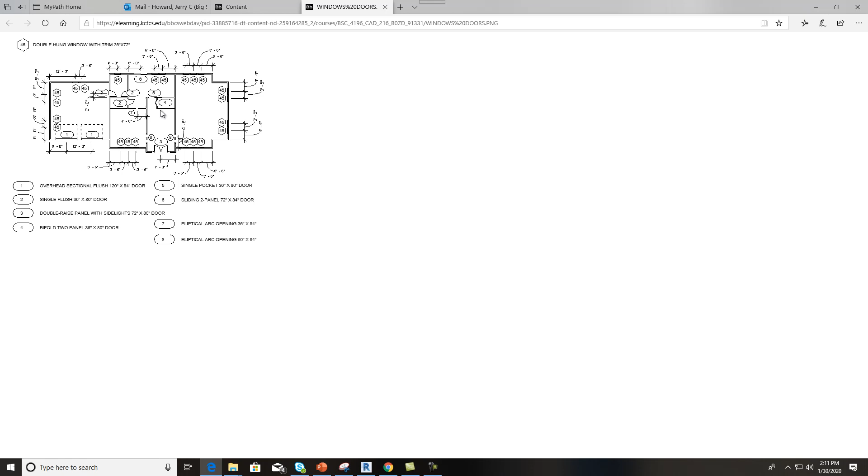I'll click on windows and doors, and let's blow that up a little bit, hitting Control plus. If you'll notice, there's windows. These are our windows and these are our measurements. Windows are always measured to the center, and the exteriors to the outside exterior edge. The interior walls are to the center. We see here these windows say 45 on those.

If you look up here, here's the symbol 45. These are double hung windows with trim of 36 by 72. We can look, and it looks like that's about all the windows in here. So it's quite a bit of windows, big windows.

The next one to look at is some of our doors. Here's our garage doors, number 1, overhead sectional flush, 120-inch by 84 door. Single flush, 36 by 80, is these number 2s here. Y'all see that? Double raised with side lights.

That'll be a big porch, so it's a double door with side lights, meaning it's got glass on the sides of it. Here's a slide door, and we got a bifold door right here.

We also got 7 and 8. Right here is 7, and you can't really see it, it's way up there, you can't really tell much about it. And right here, those are openings or elliptical arches, and this is the measurement to the center of those. This one isn't showing that well here, but it's coming 4'6" to the center of it.

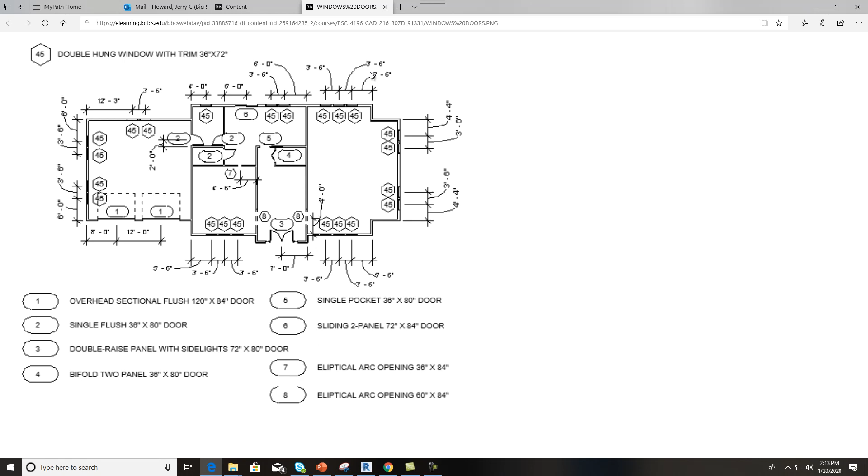So I've printed a copy of this out, but I'll still take and throw this to the side just like I have before. I'll go in there and grab my Revit again and sling it to the side. So when you start putting these things in...

There's a few things we got to understand. We go back here and look, remember I had all these loaded up. Now, Revit has a library built into it that has these things as well, but it's pretty simple to put this stuff in, like on your little cabin you did. It's the same process.

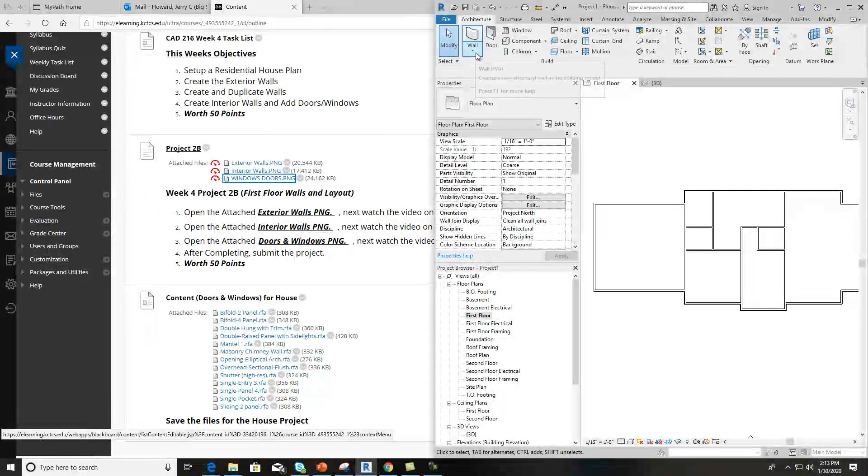What I want to do here is go into Window, and you see how there's some already put in here - there's a double hung window. We're going to put in number 45, the 36 by 72. We do have a 36 by 72, but it's fixed with trim, and I'm not seeing what I want, so I've got to load it up.

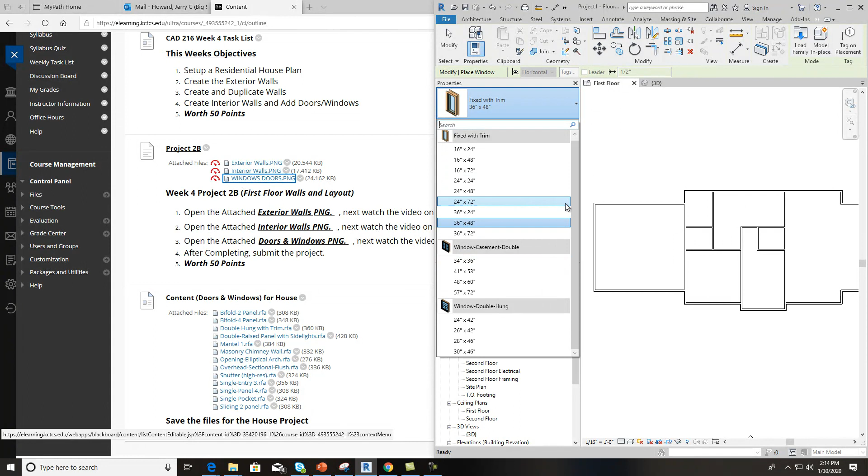Now, in this software, you can come over here and hit Load Family, and you can go in here and look for windows, and they will be there. There's all kinds of windows built into this, and you can probably find what you're looking for in there.

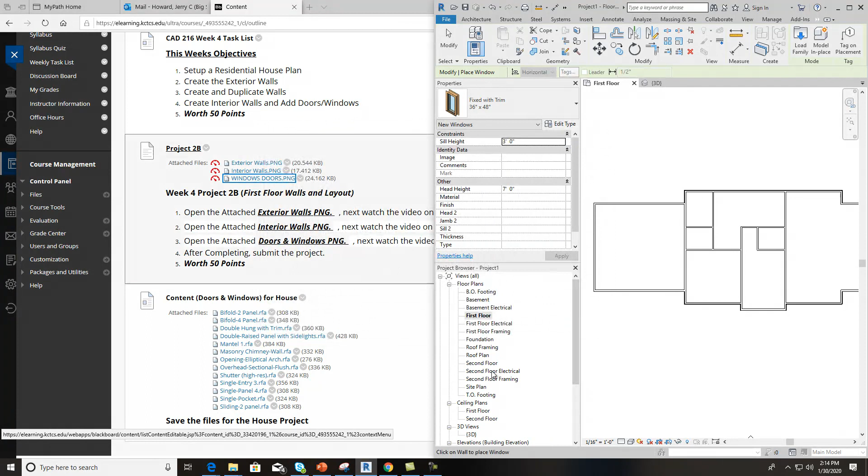But what I want to do is use what we have in here, what I've sent to you. Now, you can do this - we can come in here and find that window, which is the double hung window with trim. So I just right click on this and select Save Target As, and I want to put it... I'll put it on my desktop and save.

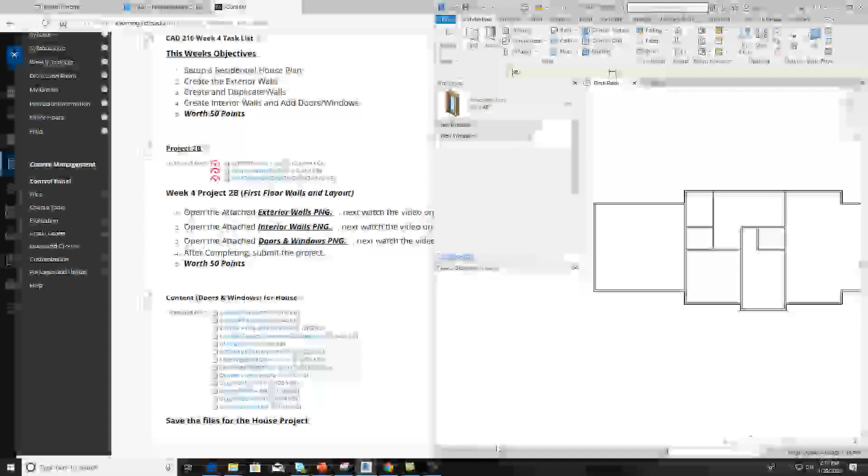Now I can open this up, and there's a couple ways to bring this stuff in. You can actually open it up just like I just did, and check out this - if you've got your software open with a project, you can hit Load into Project and close.

And now that window, you see how it's loaded in now? Let's see where it's at. Double hung window with trim. That's one way of doing it. Or you could have hit load family here.

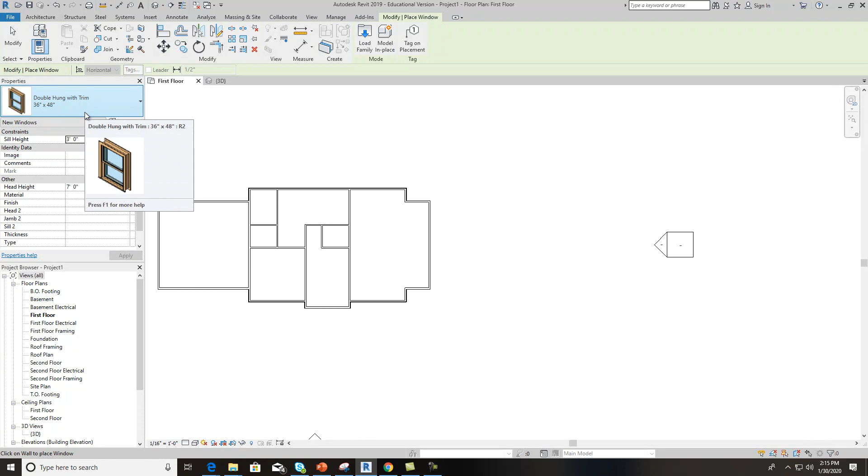You have to be in the windows or doors. You can hit load family, and then go through and find it here. Go to your desktop, so on and so forth, and load it in. Either way, but this one takes 36 by 72. So just write down 36 by 72, and go in here and zoom in.

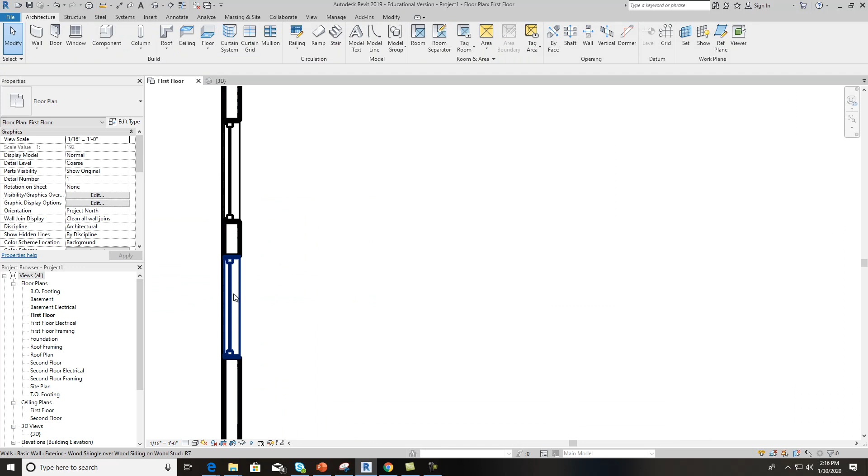I've got this sheet in front of me right now, and you just go in and start plopping them in. There's a couple on this side, and again you want this section here to be wider than this, because here's the actual window. So just start putting those windows in, and I always put them in before I try to do the measurements or anything on it.

There's one right here. There's two right over in here somewhere. There's three over here. And if I do put them in the wrong way like that, just click on it and you can flip it like that. And then window over here, and so on and so forth.

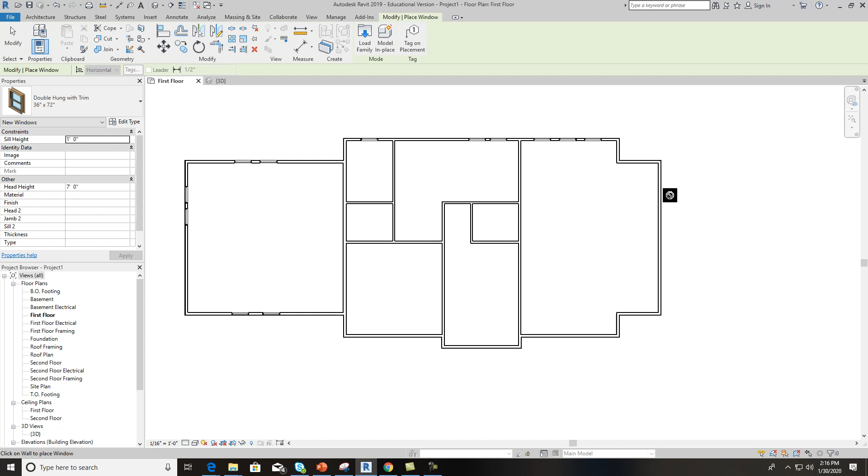I'm not going to put all this stuff in, I just want to show you how to do it. But like up here, we start dimensioning these things.

Again, click on it. This would go all the way to the exterior, and it should be 12,3. The next one, if you click on it, from the center of it to the center over here is going to be 3 foot 6. So 3,6, just like that. And that's how you get those measurements in.

So hit annotate, align, and I want to put face of core. I hit that, and see, it's not hitting exactly where I want it to. Wall faces, there we go. Wall faces hits right where it needs to.

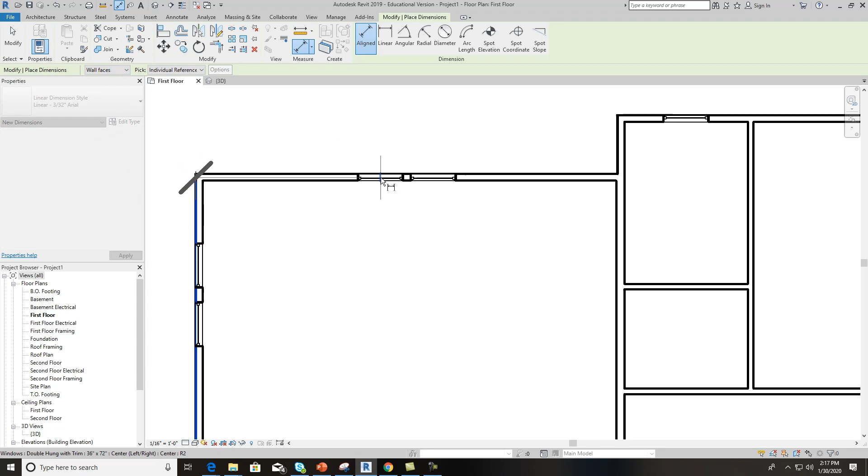And then I'll hit my center of my window to center this window, and it's dead on if you want to check. So make sure you zoom in there and look. I should be right on the end of this instead of inside of it. And you just go around and you can do that.

And like this, again, I click on that, and I click on that. And again you have to click on the window to get there. And you see I'm all the way to the edge, to the center, and this one should be 6 foot. Click on this one, and this one, between this and this one, centers of them, it should be 3,6.

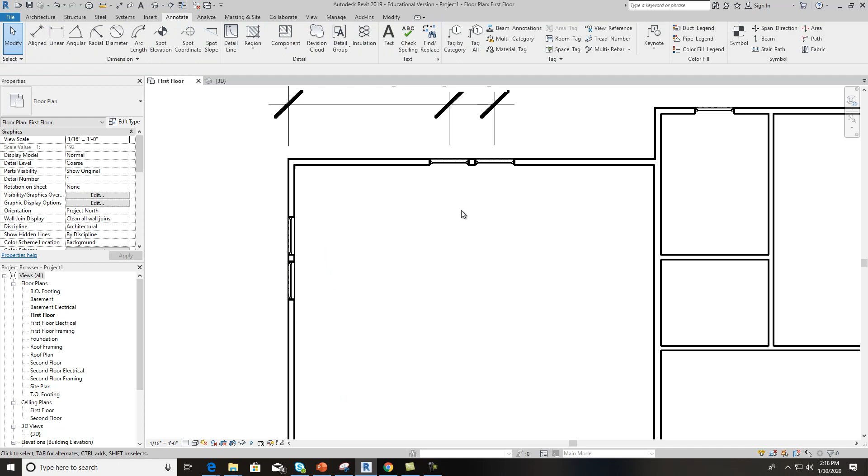So just go around after you get all the windows put in, and then get them all laid out. And I put windows down here, but that's not windows, that's garage doors, so I'll delete those out. But you can see how I was coming up with those, and there should have been some windows over here too. So make sure that you get all of the windows in and get them all measured according to this print that we have in front of us, this right here.

Okay, so now I can put my garage doors in next if I want to. And again, I'll go in here and check out and see what I got. Garage doors, double raised with side lights, overhead sectional flush. So click on that, and I want to save as.

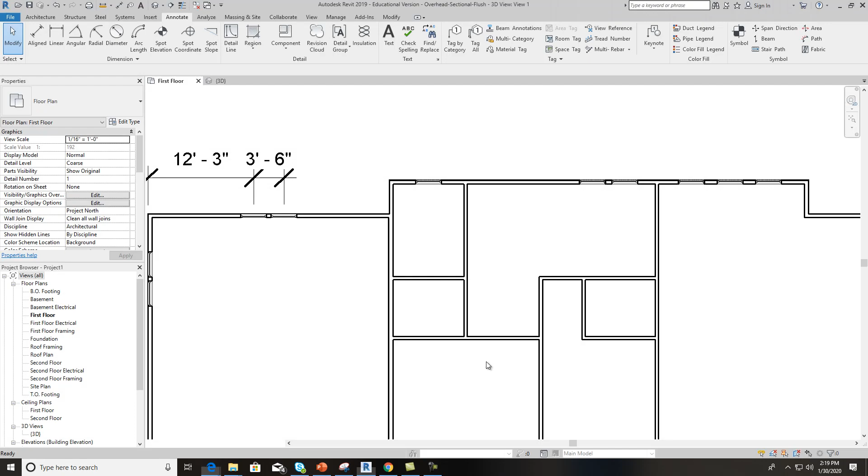I'll put it in my desktop and hit save. And now open it up, and it'll open up in here. Just load into project and close. It's a good way to do it.

I can come down here and just plop it in, just like that. Align, catch there, catch that, catch that. Come out here.

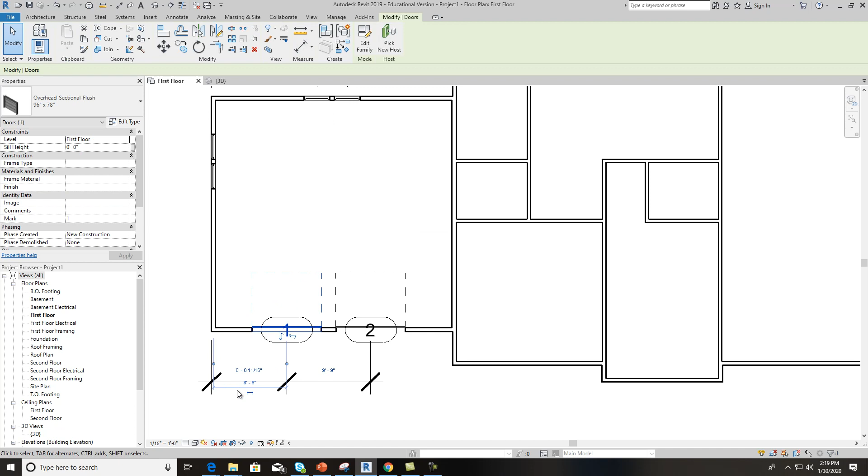I can actually click on the door itself. Click on this, 8. And I can click on this one, and here's between those, that's 12. Boom, they're in there, no problems.

And the same thing goes with over here putting in your doors. We take a peek at, like this, number 2, these single flush doors, 36 by 80.

Just go back in here. 30, and these are single flush doors. You can come in here, single entry, single panel. I'm assuming that's what that is.

We'll save as, put on desktop, single panel 4, and open it. And when it pops open, it'll show you what the door is.

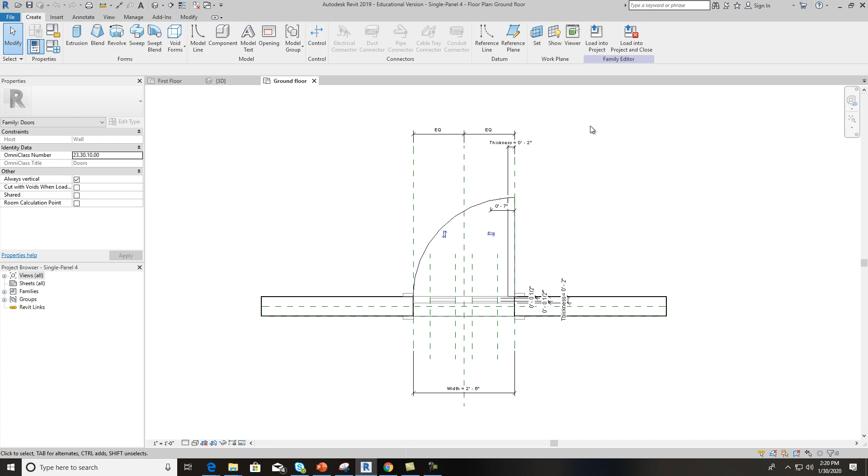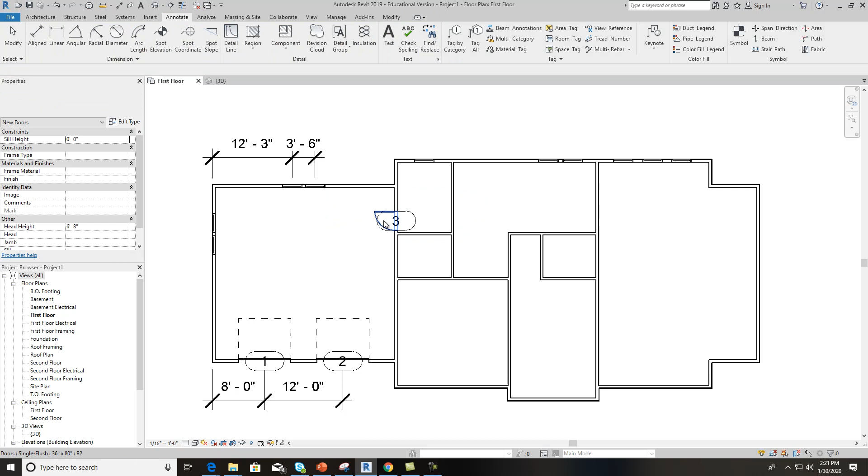So I hit load into project, and I need to go over here and see, there's a single flush, 36 by 80. I can go in here, and when I put the door in, it's just like what we did on that other one. Just click, and once you get in, you can actually tell it which way you want it to do, and flip it around like that.

It's got that big tag on it. You can actually grab those tags and move it. I got my scale blowed up so I can see this. Typically, we probably do this in 1/4 inch equals 1 foot. You see how much smaller they are? I was just doing that so you could see those.

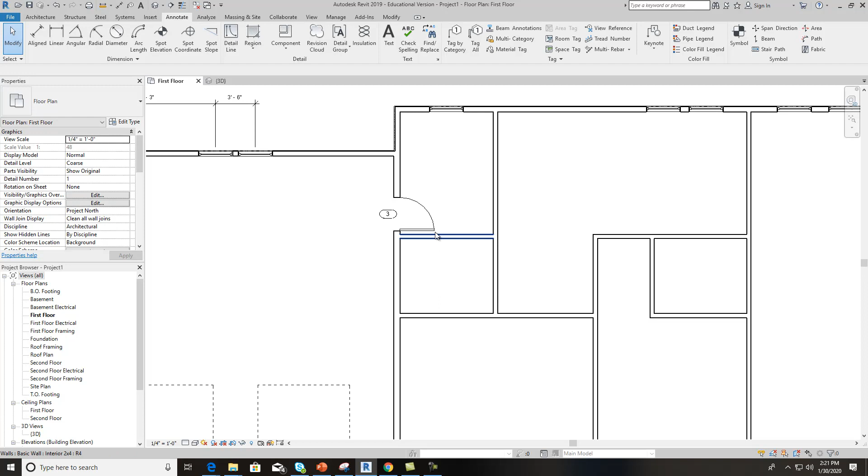And this would be right up against it like that. So again, measurement on that one, you click that, and basically that's right on the money. And you want to put one on the other side as well, so you just go back into door, and you guys know the song and dance here. Put that in, escape a few times, click on your door, turn it around, and put all of those in there, okay?

And I'll show you a couple more things here. I want to put an elliptical arch in this thing, because it does have one here, and it's got 2 down here. Instead of doors and windows, you have to hit component, place a component, and we do have those already in here. Now we can use the ones in that we have loaded up if you want to.

Let me go back out of here. Let's see here. Opening elliptical arch, click on that. We do have it. I want to save it. I want to show you all a trick here.

I can actually go into Revit now and go to component, architecture component, load family, and you can do it this way instead of doing it the way we've been doing it. We've been opening it up and sending it to the project. If you've got a couple projects open, it might not send it to the right one.

So what I do in here is just go, again, architecture component, and I come over into the modify place components, load family up, and instead of looking in here in this, I can go to my desktop where I have it saved, and I should have it in here somewhere, and here it is, opening elliptical arch, and OK.

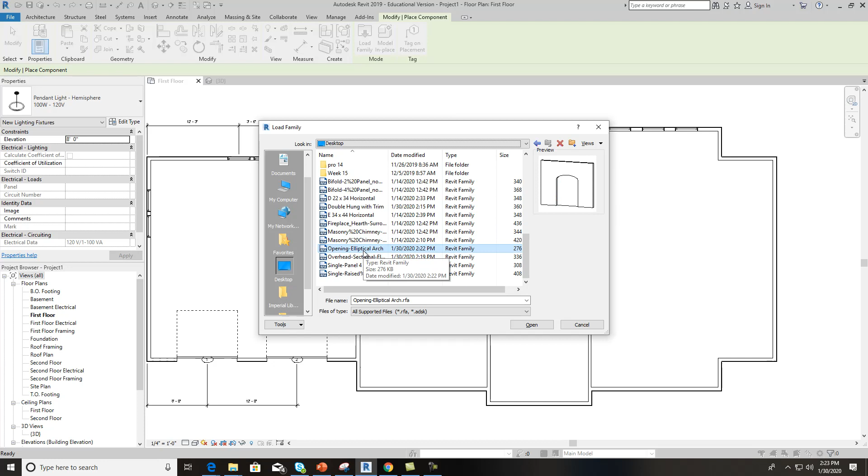And when I do that, now I can put my arches in, and the one up here is 36 by 84. So I click, it's in. Down here, I got to change those because they are a little bigger, 60 by 84. It's pretty good size arches.

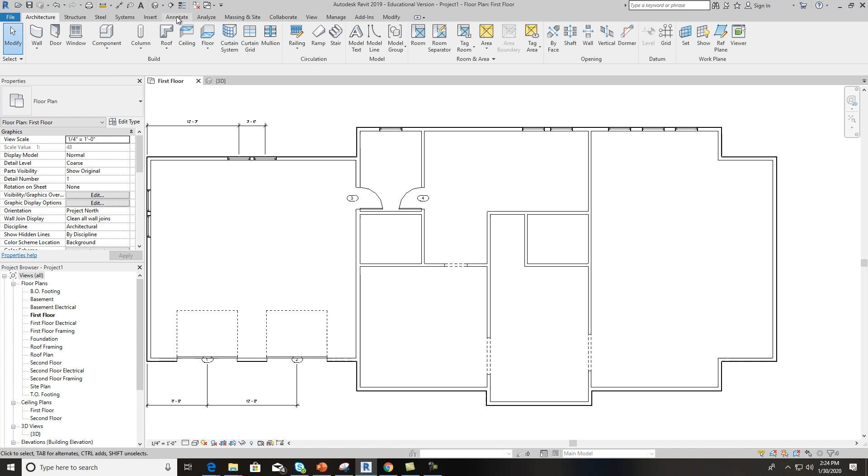So I click, and those are always shown by their hidden lines. That's how you see those. So all you have to do, again, just click and use those temporary dimensions. You can pull that down there, click on your little bubble there, your grip, to the center, click on this, and that one is 4/6 both sides, and there's no way that's 4/6.

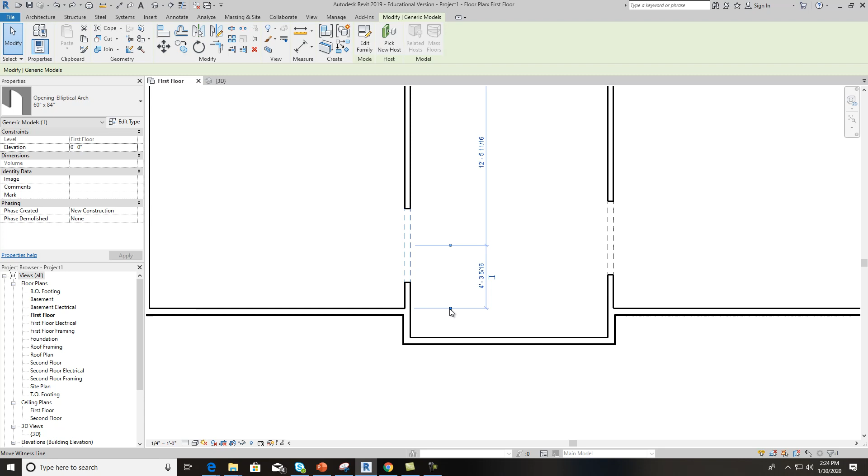Oh, I know what's going on. Click on it, and this should be to this side, and that would be 4/6. That looks a little better, doesn't it?

I can use my align tool to do the other side. Just catch that, and then come over and catch that. Lines them right up. This one up here, I can click on it. It says 4/6 from the center, 4 space 6.

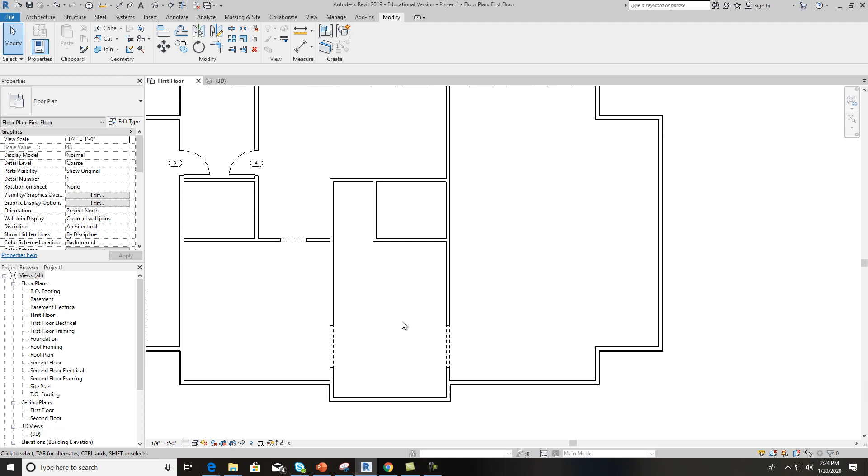Boom, there you go. And if you want to put this door in down here, again, this one, according to the print, it's a big one. It's a number 3 double raised panel with side lights. We got that one on here too. Double panel with side lights, double raised panel with side lights.

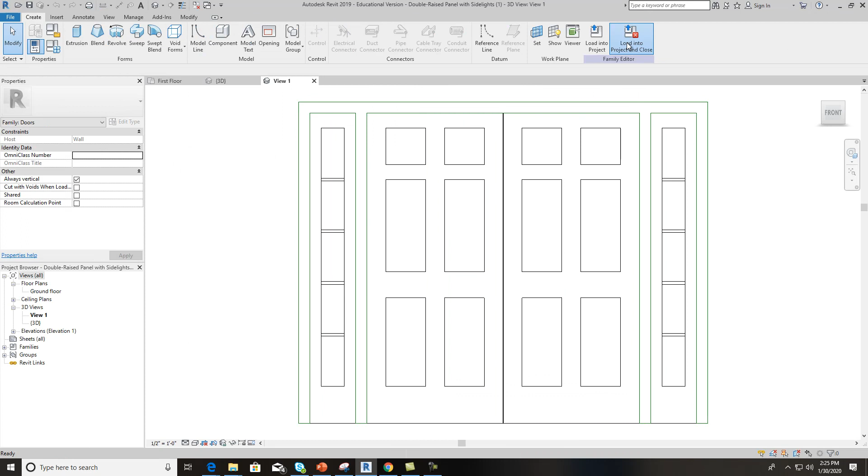And I can actually open it instead of saving somewhere, and I can load it right into the project. If you've got them like that, that's a quick way of doing it. Just come down here and bing, bang, boom. And right there is dead center of it, and that's where you want.

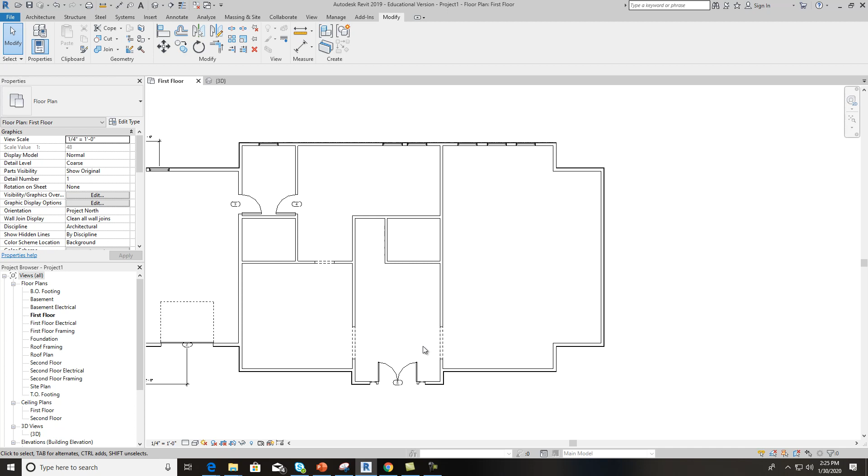And if we want to look at it in 3D, we can. It's kind of cool. You start looking inside of all this. You see our elliptical arches. You can see our doors that we're getting in there. So, and back over here is our windows.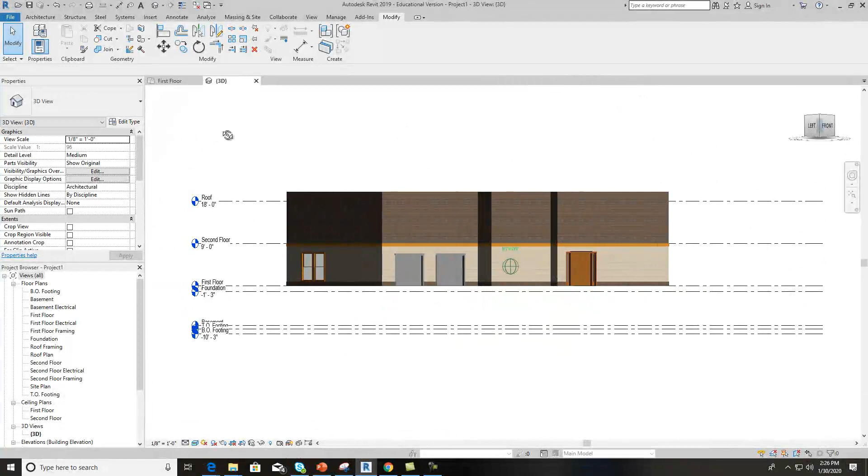And we might have to do a few things with our windows a little bit later. We might have to get the sills to the right height. They look like they're a little low, but we'll check that out as we go forward into the next lesson. So if you have any questions, let me know.